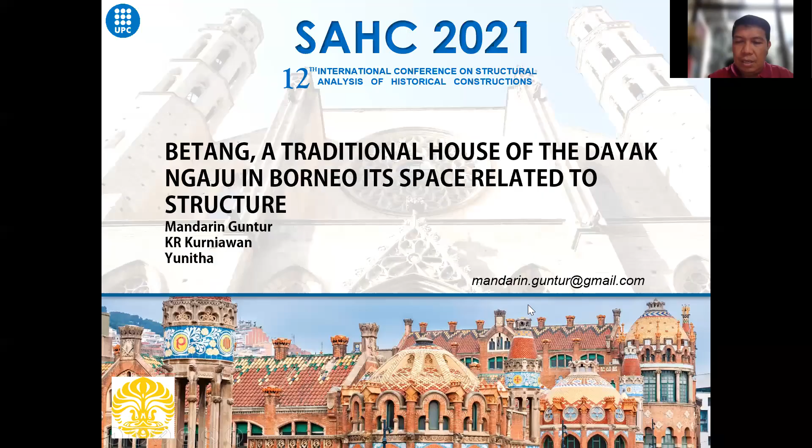This presentation will be divided into motivation, methodology, research, discussion, conclusion, and future work. I start with the motivation here.

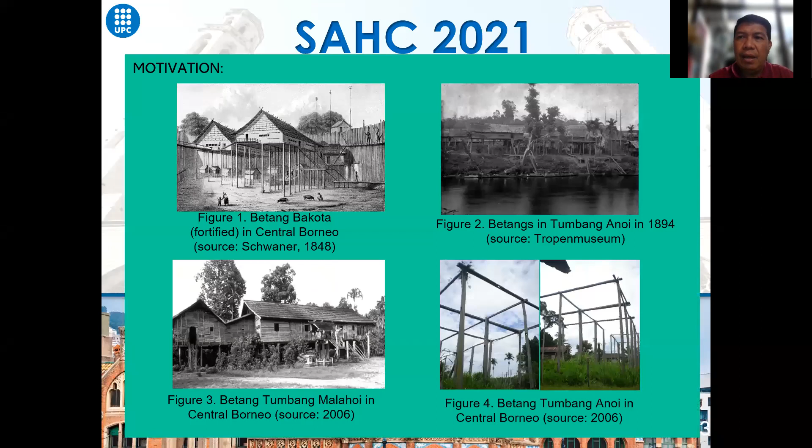Betang is a big traditional house of the Dayak Ngaju ethnic group in Borneo. For many years, Betang promoted a wooden architectural characteristic due to cultural isolation, technology, and builders who were entirely disconnected about the culture and how to build Betang to fit its original structure. Then this house slowly began to disappear.

Betang in Dayak Ngaju comes into point of design: first, as a structure designed by approaching the belief and experience of the leader; second, based on material availability, technology, and transportation around the Betang location. The study aims to explain the knowledge of the Betang structure, including form, structure, cavities, floor, wall, and roof.

As of now, some of these buildings and their elements are in ruin, only a few of them still stand. Hence, to accommodate this structure and keep it sustained, conservation of the Betang is necessary to avoid losing them through nature and culture.

Look at this figure, figure 1. It is the Betang Bakota in Tumbang Malahoi, when Schwaner was there in 1848. Now the Betang Tumbang Malahoi in Central Borneo, sourced in 2006. Look at this Betang Bakota: the height of the pillar was about 6 to 7 meters, but now it's only 2.229 meters. There is a reduction here.

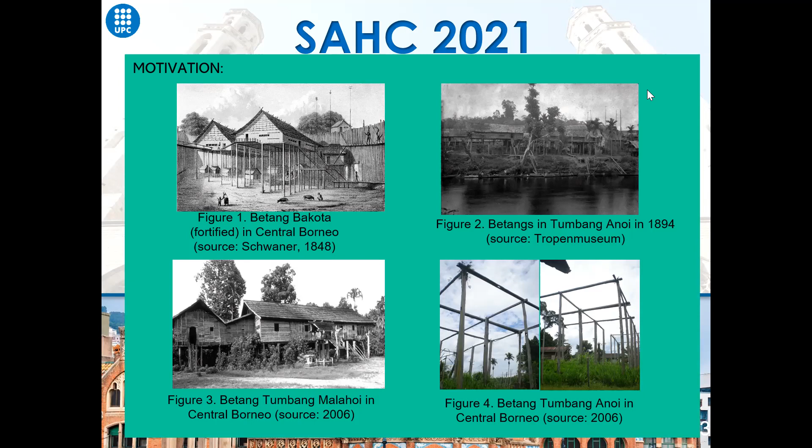The method of research led to the qualitative and descriptive approach. At first, Betang was reviewed through critical comparison of the element and space background. The second analysis of the structure of this investigation requires several points in the hypothesis, with the process among function, ties, measures, form, and its parts fitting the whole, and the appraisal gave the rest of the structure form in percentages. The sum used is a conservation value.

The review covers the proper Dayak villages, such as Tumbang Gagu, and Tumbang Anoi, Tumbang Malahoi, Tumbang Korik, giving samples, sketches, pictures, and some interviews. The argument concluded in this paper is a narration to respond to the data interpretation.

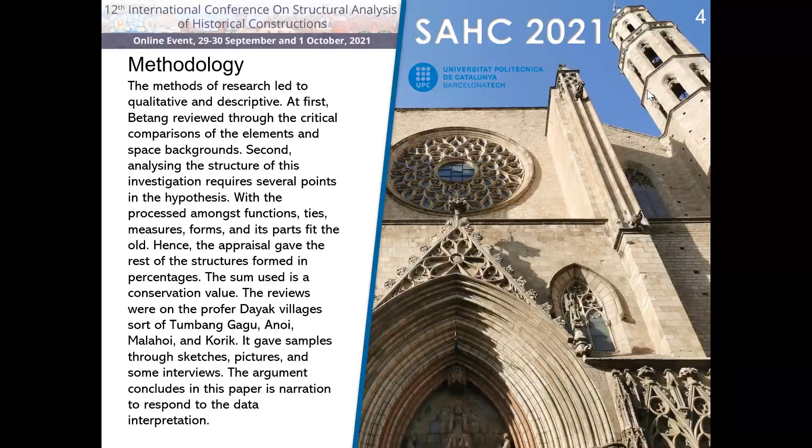Now we go to the conception of the construction background. Betang comes in rectangular form with a gable roof. Its length is about 63 dp and its width about 10 dp. One dp equals 1.70 meters; dp is the Dayak measurement method. It was high, about 3 meters or more above the ground.

Betang consists of the component Batang Huma, the main room that functions as a living room and bedroom, or karung. Dampuhan is the kitchen room, and Karayan is the space that connects the living room and kitchen. Sometimes the Karayan is an elevated field in front of the house to dry rice, sell forest products, and dry fish, about 1 to 1.5 meters above the ground.

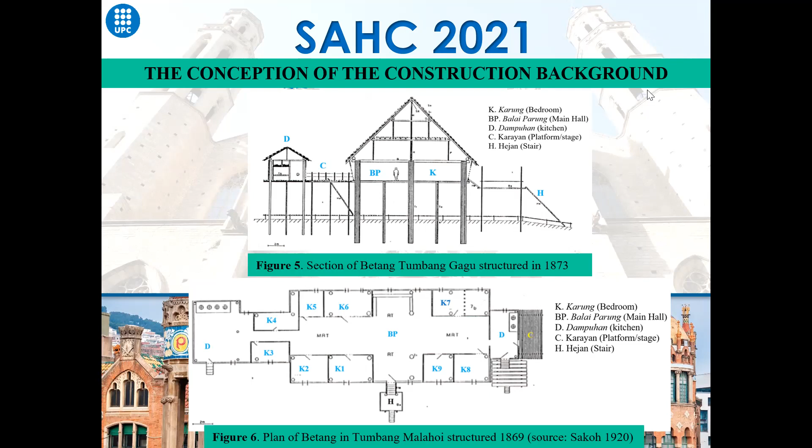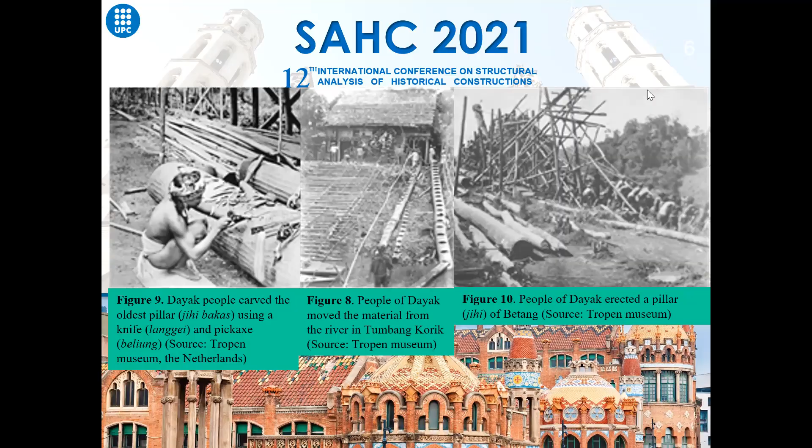Now we go to the research. From our investigation in several Betang Dayak ethnic groups, conserving Betang as a historical building is always an interconnection between preservation and modernization. Therefore, through this meaning, Betang revealed its structure as a building element, separating its construction technology into base, floor, wall, door, stair, and roof.

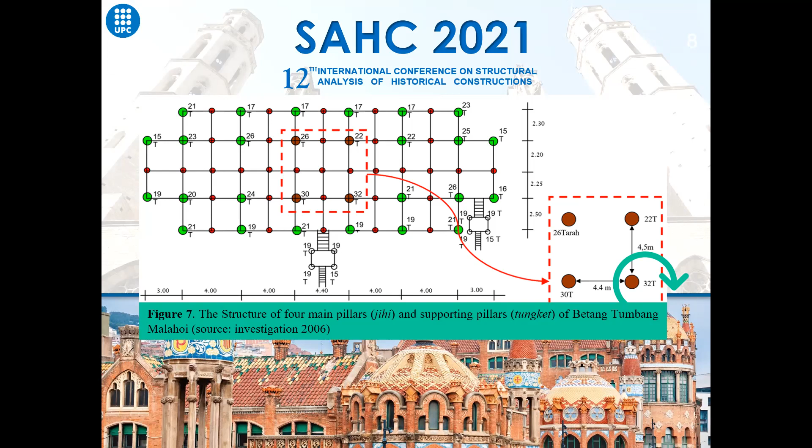Jihi should come from ironwood, shouldering the entire construction load from the rooftop until the foundation, delivering it to the ground. Tungket as the supporting pillar is only to shoulder the floor. The pillar lays below the handaran. The post is locked upon the supporting pillar or connected to the main post. The joint on this construction used a wooden pin or rattan tie.

The construction system using post and beam is shown in this image. On the slide, you can see how Jihi supports the bulk.

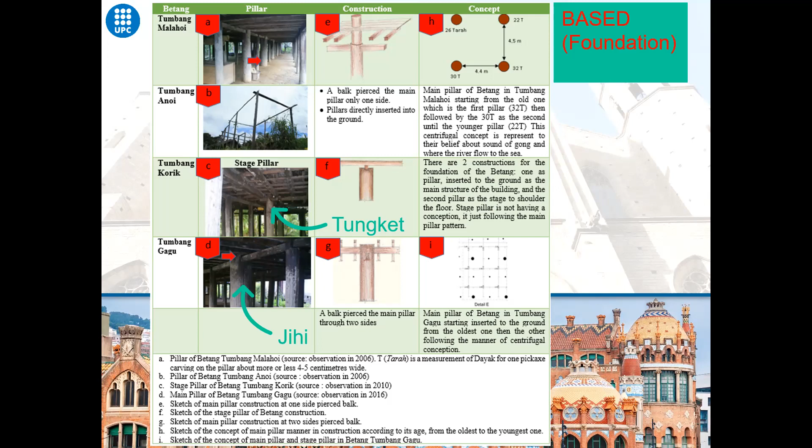The second element is the floor, which consists of ironwood board with incised big edges, about tara along 4 or 5 meters. The width of the board is around 30 or 40 centimeters.

The Betang floor construction initially used small timber or bamboo, with diameter approximately 3 or 4 centimeters above the state policies. At that time, all construction used rattan type and original wood material. So this is the construction of the floor.

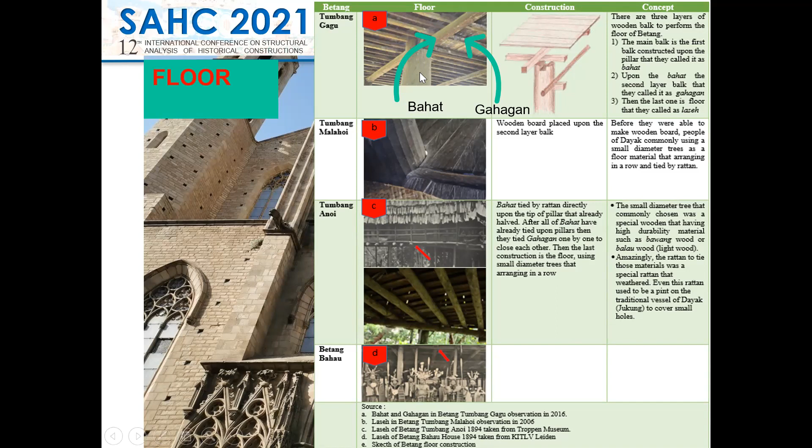Here is a bahat, and this is a gahagan. Bahat looks like a slope in our modern architecture, and this is the jihi for the stage or the pillar. The third element is the wall or cavity and stair.

The wall comes from the skin of trees or wooden pendle, tied neatly, arranged and cleaned. Wall of Betang commonly uses tree skin. There is a split cavity between the coat of trees that allows the breeze to come in and out.

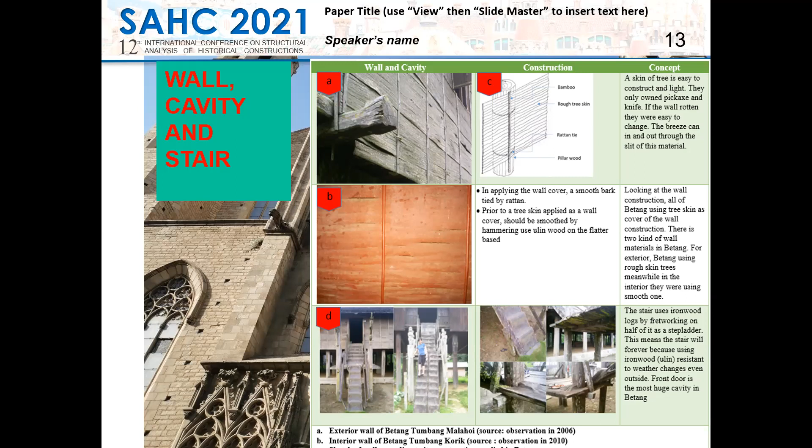Stairs are the most essential part of Betang because through this ladder, various events in the Betang occur. The stair, or as the Dayak call it, hejan, is an interpretation of the way to heaven.

Making hejan requires ironwood, with diameter at least 40 centimeters. Slabs are formed to make a ladder or lampat. The number of lampat must be odd because it represents the order of the heaven.

Then they make sandehan, or border ladder, on the 7th or 11th part of the stair. This sandehan serves as a place to put the coffin in the tiwah, which is a delivery spiritual ritual that happens. The whole regal hejan is the lampat and sandehan system.

In addition, on the hejan, some statues mark woman and man, signifying the gatekeeper of heaven. It is also the orientation of Ngaju, facing the east. They call it the Takuluk Hejan. The erection of the Takuluk Hejan requires a separate ceremony that involves some offerings as the basis of the Hejan poles.

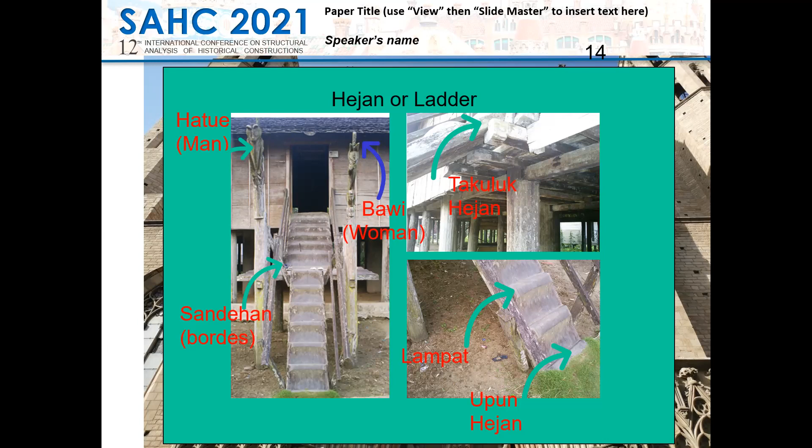The last construction element is the roof, composed using sirap, a thin and smooth wooden material. Its width is 40 centimeters and 80 to 100 centimeters in length. The order of sirap contains an aslar pattern.

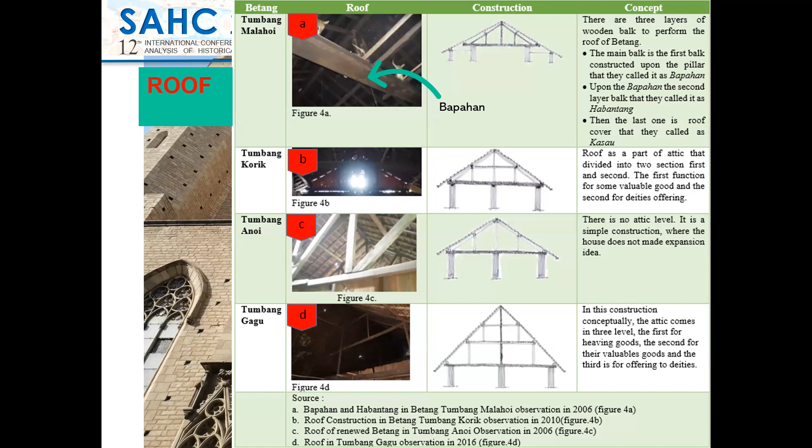Now look at this picture, the handaran over the guntung and bapahan is also over the post.

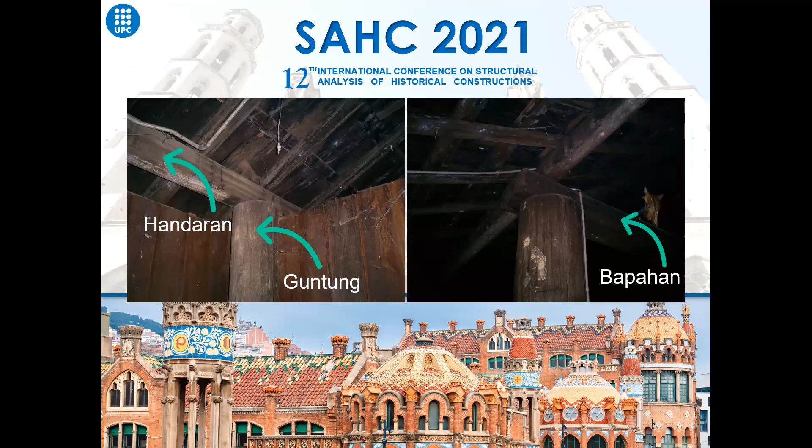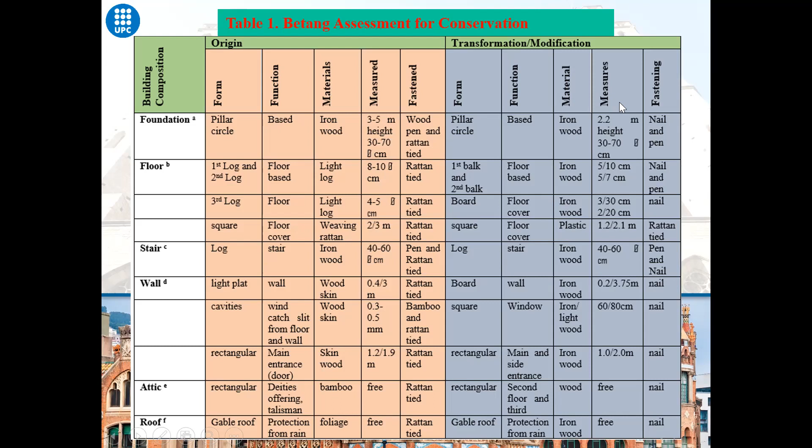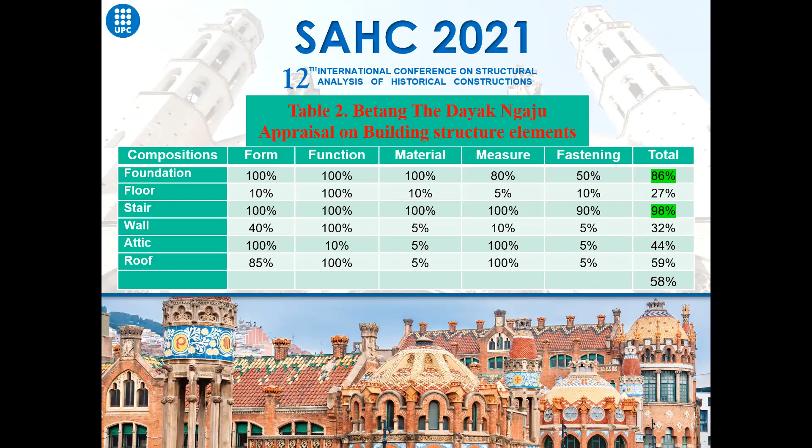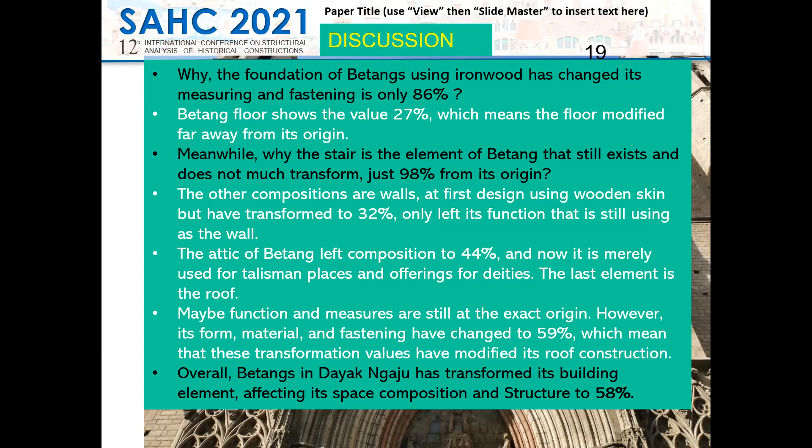Why the foundation of Betang using ironwood has changed? Its measurement and fastening is only 86% of our discussion. Betang floor saw the value of 27%, which means the floor modified far away from its origin. Meanwhile, the stair is the element of Betang that still exists and does not transform, just 98% of its origin. Overall, Betang in Dayak Ngaju has transformed its building elements, affecting its space composition structure to 58%.

Our conclusion here, there are many conclusions, but I will read only the 3 or 4 main points. Betang is about the dichotomy between the ground and above, and the other. Betang will become extinct if the government and other stakeholders do not protect and conserve its buildings within the planning program. So conservation of all Betang structures across the entire island of Borneo is inevitable.